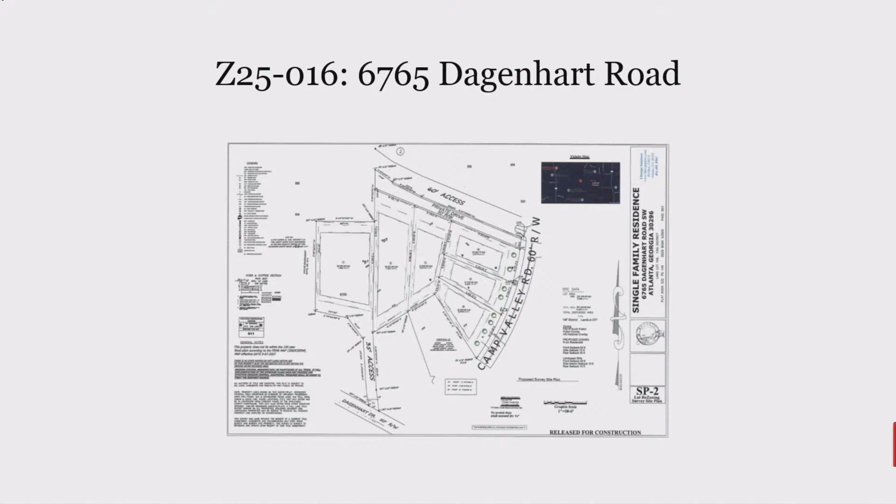Can you tell me what your estimated square footage of the homes are going to be? Between 3 and 5,000 square feet each. It possibly varies because each lot is different and the buildable area varies on each lot, but the largest home that would be built is about 5,000 square feet.

If you see the one that has an access road on Dagenhart, that's the largest lot, on the far left. The driveways for the other ones have an access road on Camp Valley Road, and at the top we're going to put a private drive for the two lots next to the one I just pointed out. The other three will be driveways entering on Camp Valley Road. That's another street - it's intersecting streets, so I've got two street fronts.

I was concerned about the private drive - is that already there, or are you building it? Yeah, there's one already there, but we're going to put one on our property so we don't have to do an easement with the next door neighbor. I think that's already a shared situation.

Are these on the sewer system, or are you going to try to put in septic tanks? I'm going to put sewer on Dagenhart. Like I mentioned, if you see the one on the far left, directly next to that is a subdivision, and the sewer line runs to Dagenhart at the bottom right there. So we're going to take it on around up that access road.

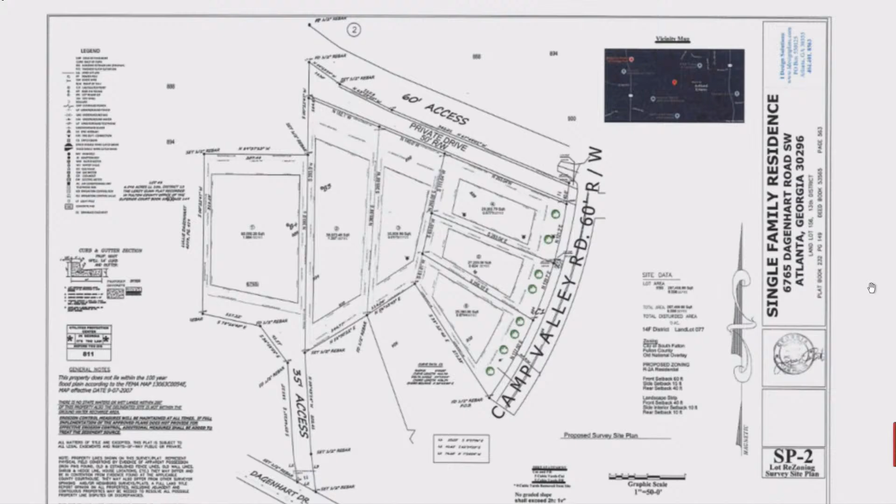Do you have any examples of facades, or a description of what you're doing? Not yet - we're at the very beginning, which is getting it rezoned. But it's not going to be any cheap house, it's not possible for us to do that. That's why the homes would be between 3,000 and 5,000 square feet.

So you're possibly expecting multiple sides, masonry, brick, stucco? We'll be in stone, in compliance with all of the overlay - it's an overlay for Old National. Well, that's true, but I didn't know if you had some conceptuals. No, not at this moment.

But you will have those before approval? Yes, okay. We're not at the land design stage right now, we've just got ideas. We're not trying to go outside of compliance with the overlay. The overlay has specific restrictions on color, I understand that, but also facade materials and things of that nature. Someone's going to want to know conceptually what these homes might look like, and that it's nothing too crazy.

And your participation meeting is when and where? That would be handled by Ms. Hunter, it'll be sent out to you. I'll make sure to get your information. Okay, alright, thank you.

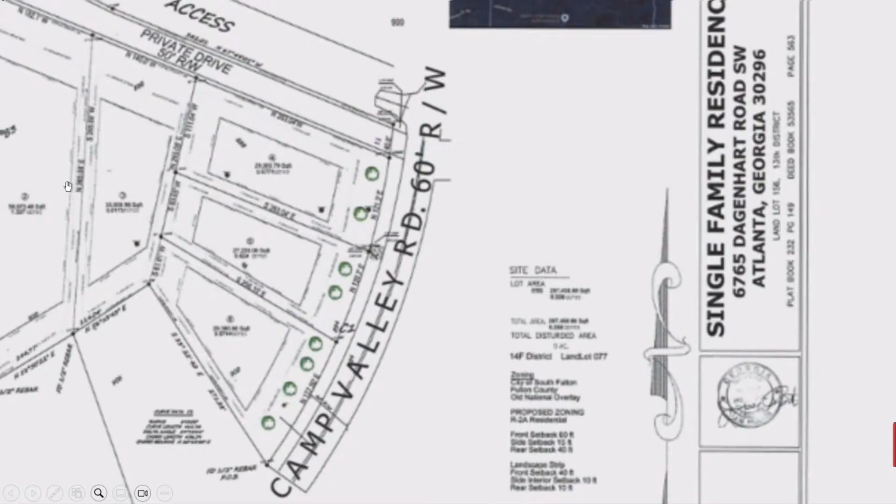Will any of the properties have access to the public streets, or will they all have access to just that private drive? No, that public street is Camp Valley Road - see those three right there? They're facing Camp Valley Road. Those are public streets, and the other one on the far left is a public street, that's Dagenhart, down at the bottom. But Dagenhart will only be accessed through that 35 feet access point, right? Yes. And then the other two will be accessed off the private drive? Yes, correct.

So just to be clear, those two off the private drive access won't have access to a public street - it'll just be that private drive that gives them access. Yeah, correct. Because it's two properties that sit in front of them on Camp Valley. So it's an odd shape, there would be no way to do it otherwise.

Alright, does staff have any additional questions? Thank you. The next case we have is Z25-017, 0 Campbellton Road is the address.

We have Hakeem Hewlett - oh, he's not here. Oh, I'm sorry, do we have a representative? Perfect. My name is Maisha Rashad.

I'm here on behalf of the applicant. I'm looking at the agenda, and it is 0 Campbellton Road. We actually have two applications pending. The first one is an amendment to an application we submitted back in 2024, and the amendment just adds an additional 8 units - I don't think we're looking at our site plan, but it adds an additional 8 units above a commercial space. So we're seeking to add that to our initial request. Then the one that's on the calendar is a new request for the parcel that's immediately next - there it is right there. It's 12.5 acres to develop about 58 for-sale units. That's it.

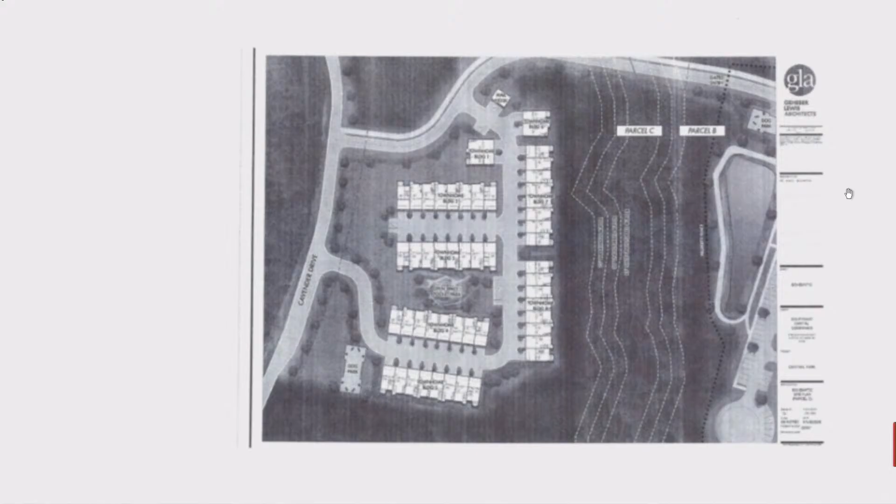Can you summarize the development as a whole, in terms of units for townhomes and single family? For rent units, after the amendment, it was initially 314. We're adding 8 more, so that's 322. For the for-sale piece, we'll have approximately 58, give or take, for sale homes.

On our first request, we met with the neighbors and they wanted to see for sale units. So our clients went back and purchased this piece, and hopefully this is what they wanted, to now offer for sale and for rent.

Can you speak to the amenities? Will this parcel also have access to the amenities for the whole development? I don't know, I can get back to you on that. We're pretty new on the for-sale piece, so that hasn't really been discussed, but I guess that's something that could be added. I think the townhomes will have their own amenities, but if that's something they want, I think they'd be willing to do that. Initially, our thought was this would be a separate parcel. They're right next door, but it'll be its own little community.

Okay, thank you. Do we have any additional questions for staff? Also, I wanted to mention that we are having our public participation meeting on May 22nd at Renaissance Church of Christ at 6 p.m., in case anyone has additional questions.

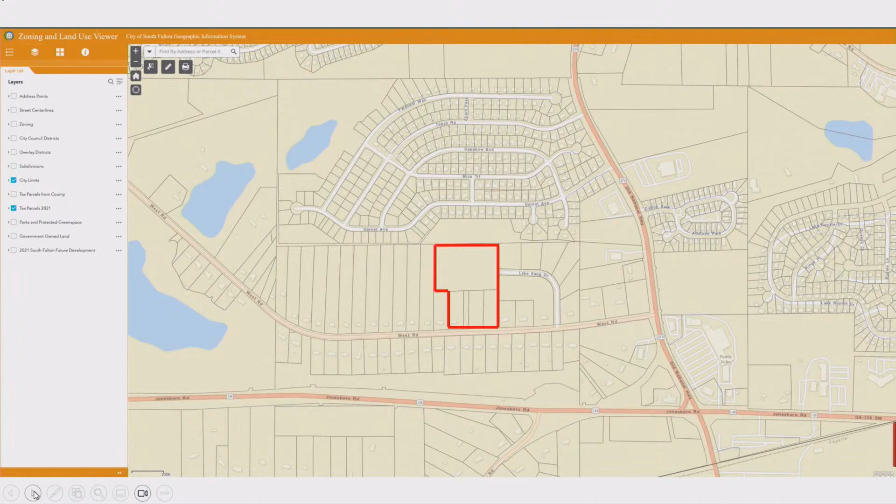We can take a look at where this property is in the city. I've got it highlighted here - the property is located just west of Old National and just north of Jonesboro Road, really tucked down in the southeastern corner of the city. I've got it highlighted on the next slide so you can see the zoning in the area.

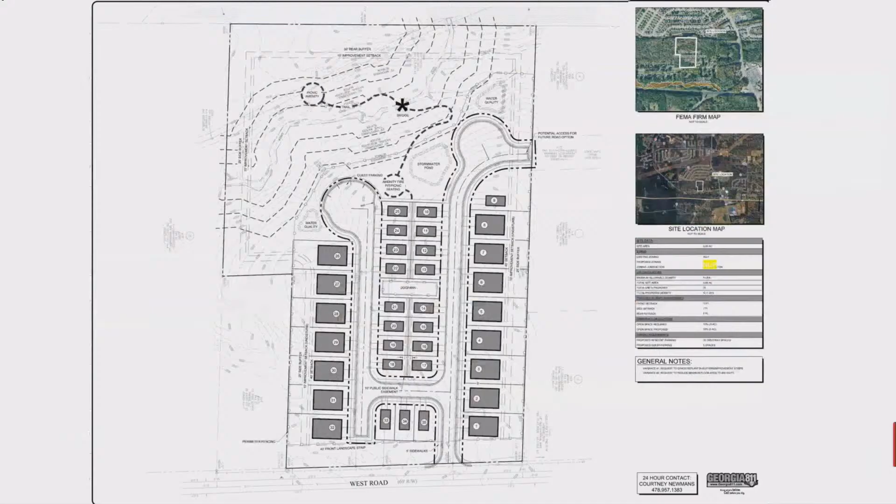Before we jump there, we do have two points of entry. I want to point out one directly off of West Road on the south, and then another one that exits east onto, I think it's pronounced Lake Zhang Drive. So that'll connect in there, and folks will be able to get out.

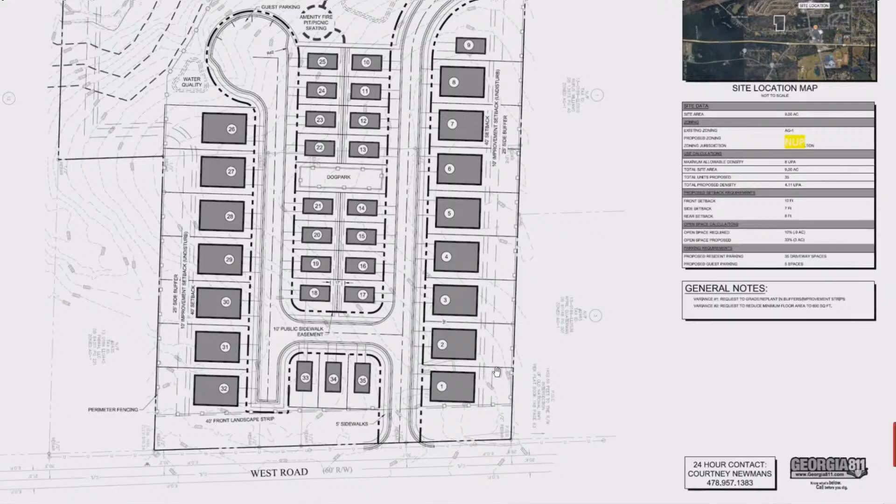Two ways, should there be a blockage on one, they could use the other. And then we do have some elevations we can run through quickly of both the smaller and larger homes. These ones are going to be on the smaller side, ranging in size from 1,300 to 1,700 square feet. And then on the next slide, the larger ones start at 1,700 and go up to 2,200 square feet.

Right now, my client's telling me that they're speculating. Just keep in mind the market is subject to change, but they're talking about starting at $450,000 for these houses. And that should be all I have for you. Happy to take any questions.

Thank you. Do we have anyone in the audience that wants to ask any questions or express any concerns?

Hey, Mr. Venable, I want to repeat some of what you said. The price range, they're speculating right now, starting at 450? Okay. Can you tell me how many approximate acres this development is? I'd have to refresh my memory. I think it's around the 16 acre mark, but I could be wrong on that.

I was kind of perplexed because the description here doesn't match up to what you just said, and it's nothing to do with cottage homes. So my client was calling the smaller homes cottage homes. There was a time when they were throwing around the 600 square foot number, so it would really be much closer to a true cottage home. But I was informed, I think yesterday, earlier today, that the smallest home is going to be 1,300 square feet. I would argue that really isn't a cottage home, but that's what they were calling it.

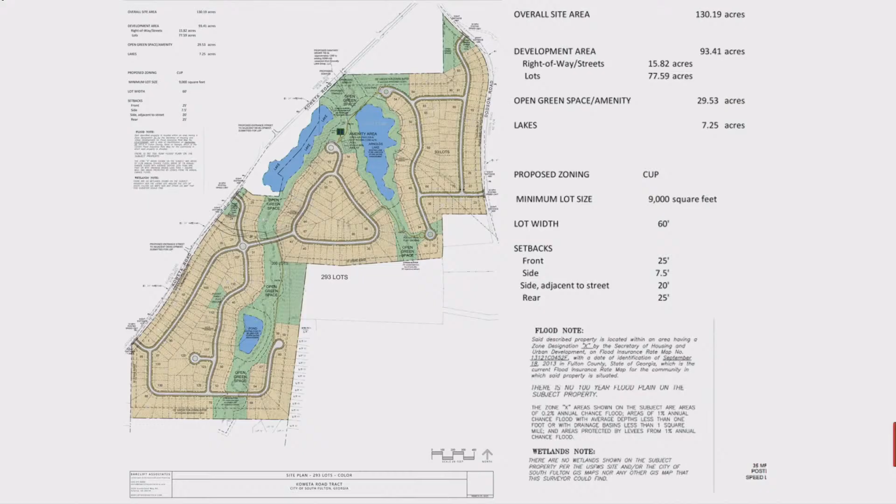Let's jump to the next slide and take a look at the amenities. It's a little hard to see here, but on the left I tried to highlight a centralized amenity area. This amenity area has a pool, a pickleball court, a fire pit, and you can see that walking trail. One of the trails I mentioned links right up into this amenity area, so folks will be able to access it without having to get in their car - they can just walk and enjoy these amenities.

On the right side, I've got the southern portion of the trail and open space that connects the east side of the property to the west side. On the next slide, we've got even more trails and open space, as well as a pocket park. On the southwestern side, you can see that trail continues and curves through this open green space, and tucked in there between some of the homes we've got that pocket park. Again, all of it's accessible via trail and sidewalk in the community.

Given that this is a larger development, we do have several points of access - I counted four: two on Koweta Road and two on Dodson Road.

And that's all I've got for you this evening on this one. If anyone has any questions, I'm happy to help.

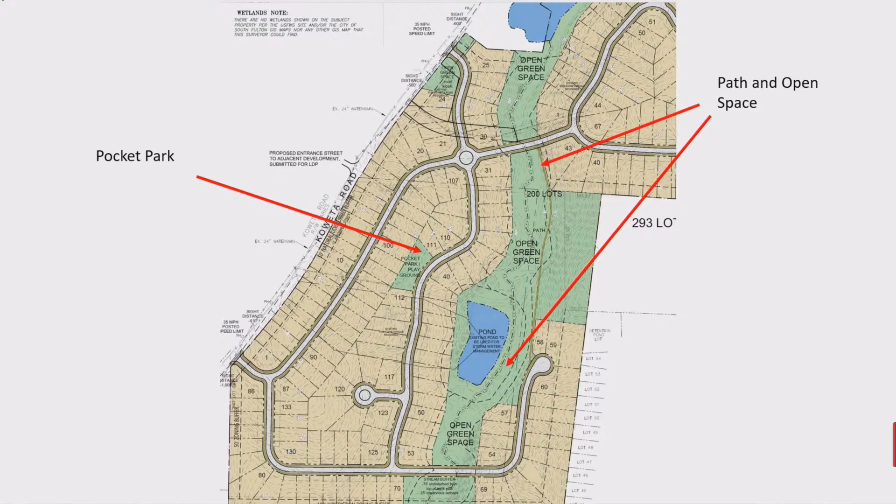I do have a quick question in terms of your amenities. Can you speak to the parking that'll be available for residents who do choose to drive to those amenities?

Sure, if you could switch back to the slide where I've zoomed in on the center amenity, you can see off the cul-de-sac there are a couple spots there. However, it's expected that most residents will access via the walking trail.

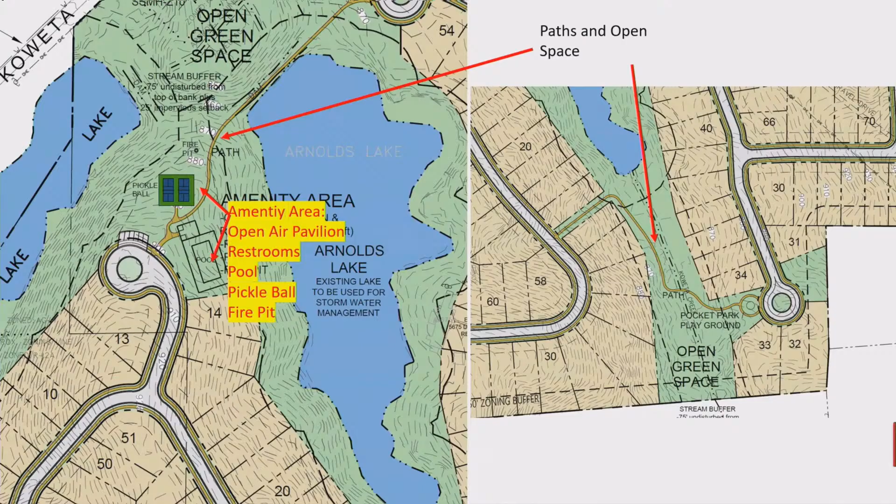Alrighty, the next case we have is Z25-014. The address is 4220, 4320 Union Road, 0 Union Road, and Union Road rear. Templar Development and Battle Law are requesting to rezone sub C to CUP to develop 121 single-family detached homes on 47.67 acres.

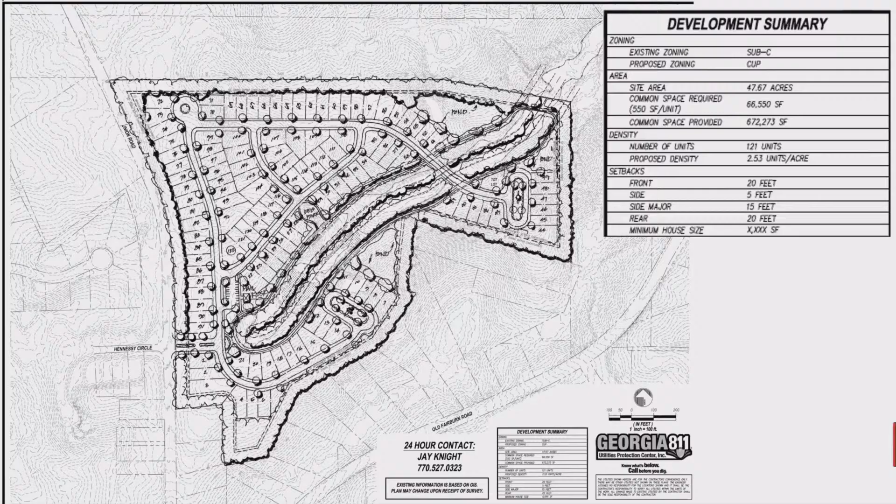We are meeting all of our buffer standards for that stream, so nothing happening there. Zooming in on the next slide, you can start taking a look at some of the amenities we have. This tot lot is situated towards the rear, in the northeast portion of the property. The dog park is more centralized, where folks will be able to access all these amenities via sidewalk, to walk their dog out there and take their kids to play.

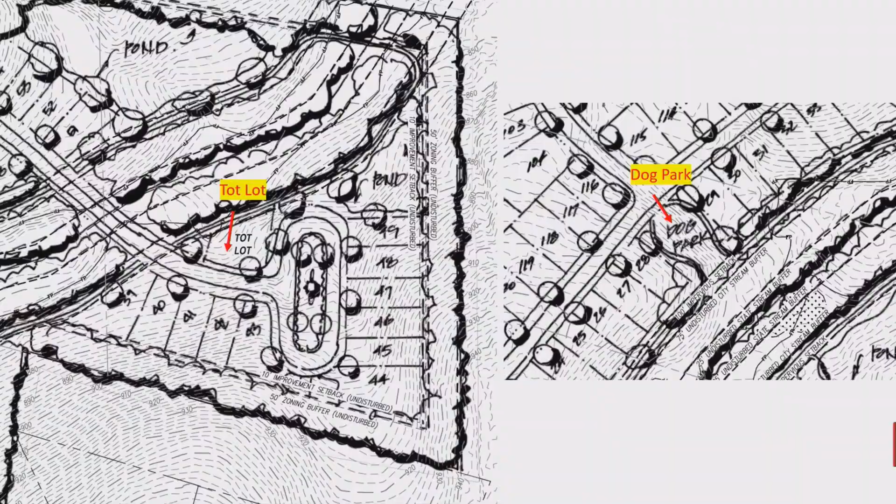And that's all I got for you. If anyone has any questions, again, here to help.

Thank you. Do you have any questions or concerns from the residents? Do you have any questions from staff? Seeing none, thank you.

The next thing we have on the agenda is the text amendment. A text amendment by the City of South Fulton to allow assembly of banquet halls or event centers as an accessory use at golf courses with or without a country club.

Alright, do we have any questions from the residents? Seeing none, we'll move to the next item on the agenda.

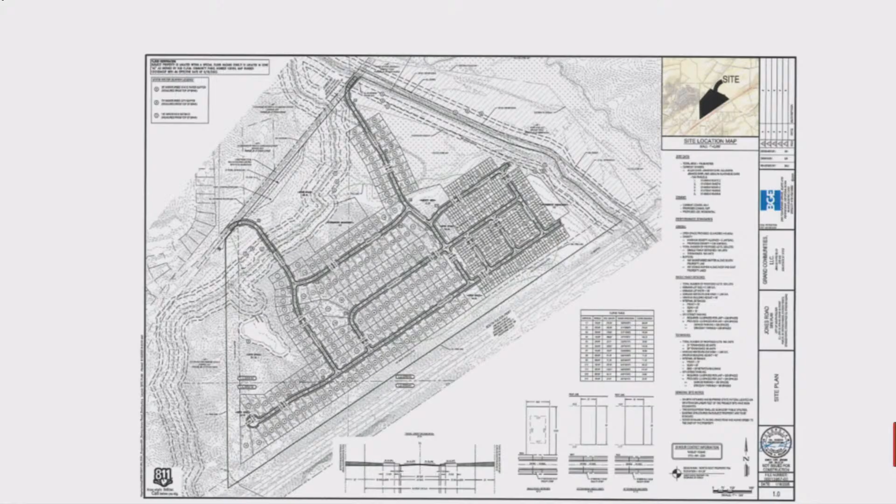South Fulton is below us, Jones Road is at the top, Cedar Road is down to the left, where Jones Road dead ends almost, it comes in. So you're right, traffic is an issue, and we can't solve all the traffic problems, but what we can do, and would like to engage in discussions with the community about, is contribute to traffic controls, doing what we can to manage the traffic.

If there's a contribution to make toward a dedicated turn lane to help that intersection, it may need studies at that intersection. I agree it's got that issue. Right now, on the long-range comprehensive plan, this is designated village mixed use, or work-live, and we're actually taking it down in intensity by going to this residential zoning. That mixed use has a mix of commercial and residential, and we're trying to go down on the long-range plan to suburban one. So one can look at it as us trying to lower the intensity, but that doesn't help the traffic.

We're happy to engage with the community, and if you reach out after this meeting, that'd be a great way to start that process. Thank you. Any more questions from the audience?

I did have a question. Could you break down the square footage of the townhomes and the single-family detached dwellings? And also, did you discuss any amenities that will be on the site? Sorry if I missed it.

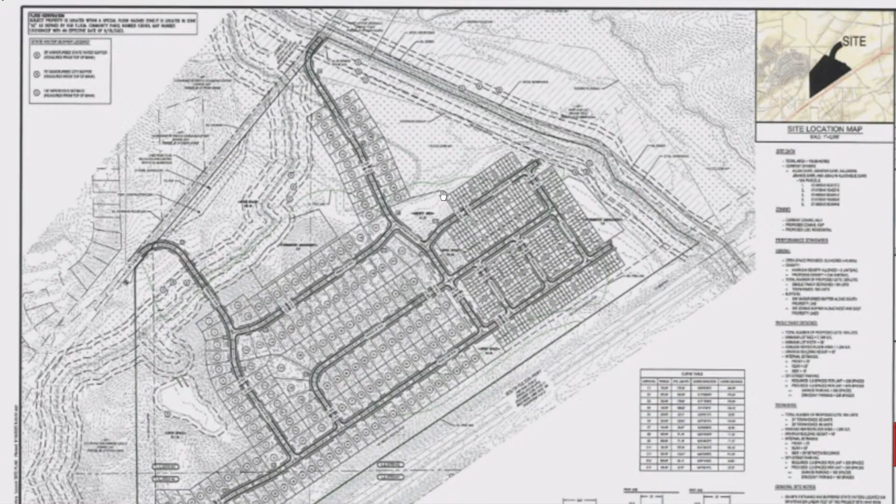But if somebody, and this is a big ticket item, I think the community would like it, a full-on connection, just like Highway 92, a full crossing that goes from Jones Road down to the highway and then crosses over, and even on the south side to connect there, which is not in South Fulton. But that project, even if everyone at GDOT said let's do it, it's 10 years away, because it has to be budgeted, get into their capital improvements program, contracted. It wouldn't be on our property. The crossing they've been looking at is a little further to the north, to the right, so I call it northeast. But it's not on this property, although I think it's right next door. It kind of goes along the lowlands on the neighboring property.

Okay, thank you. Does the resident, staff, anyone have any additional questions? If I may add one more comment.

It seemed like a very uphill battle. To be honest about it, in the next 7 years we'll probably have a lot of people moving out of South Fulton in that district. District 4 is already overpopulated. Infrastructure is not the best, and if we build more residential, it's going to be a true hazard getting out and going to work. And the development needs are not in District 4, period. That's why a lot of people are getting ready to leave. And if I may say honestly, in 10 years we will lose this city, and the city will be in the fastest downward spiral if we don't develop correctly and really get the community involved.

I like what you got going on over in Dawson. That is a good area for that building. I agree with all of that. That is a perfect area, and to have infrastructure to accommodate, like I said, connecting the old Fairburn Road. That is good residential, and more people want to downsize. In that area, more people at 60-some years of age want that type of living. But I'm for the right things, but I can see how this would be a hazard, and it would expeditiously drive people out of their community because of that. They would go ahead and start getting the equity out of their homes because it's just going to make it more clustered.